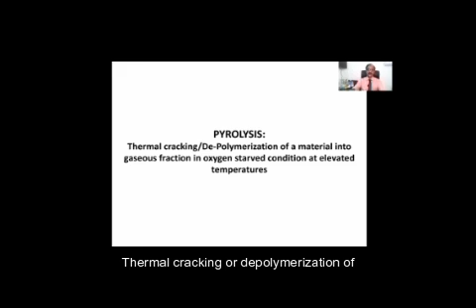Part 3, pyrolysis statement: thermal cracking or depolymerization of a material into gaseous fraction in oxygen-starved condition at elevated temperatures. Pyrolysis reactors: there are two types of reactors, batch type and continuous type.

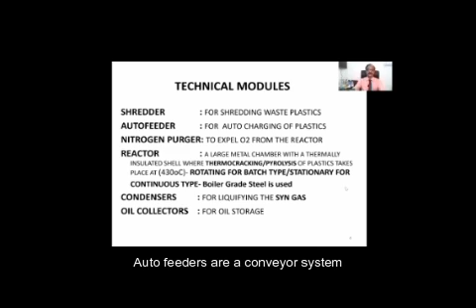Technical modules of the pyrolysis plant. Shredder: for shredding waste plastics, we use shredders. Autofeeder: autofeeders are a conveyor system used to carry plastic waste into the reactor, for auto charging of plastics.

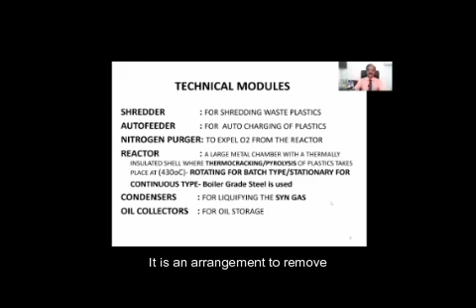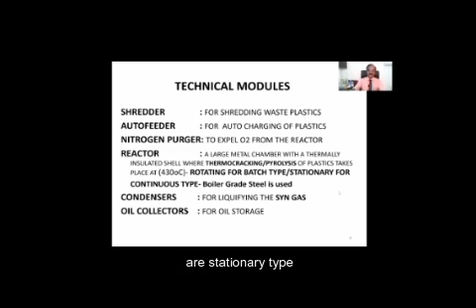Nitrogen purging machine: it's an arrangement to remove oxygen from the inner reactor. Reactor: a large metal chamber with a thermally insulated shell where thermocracking or pyrolysis of plastics takes place at 430 to 450 degrees centigrade. Batch type reactors are rotating type, and continuous type reactors are stationary type. Boiler grade steel is used for making reactors.

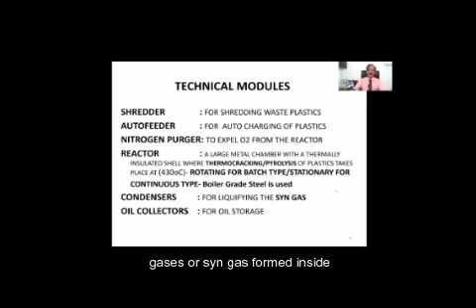Condensers: a series of condensers are used to liquefy the hydrocarbon gases or syngas formed inside the reactor. Oil collectors: the liquefied hydrocarbon gases will be collected in oil collectors. Plastic shredder: plastic shredders are used for cutting waste plastics into small particles. There are different brands of plastic shredders available in the market.

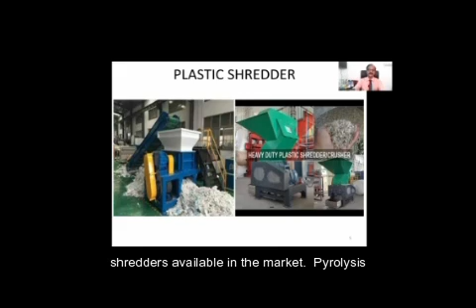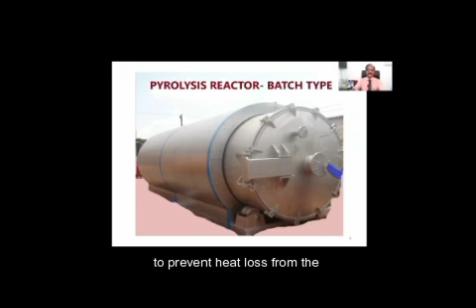Pyrolysis reactor batch type. A batch type reactor has two components: one is an outer shell and an inner rotating chamber. The outer shell is stationary type. It is filled with insulating materials like silica wool to prevent heat loss from the inner reactor. The temperature inside the reactor has to be kept constant and steady for efficient cracking of plastics.

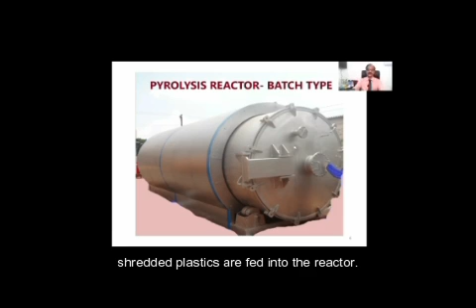This is a big door of the batch type reactor through which the shredded plastics are fed into the reactor. This is a ball bearing on which the inner reactor is rotating.

This is an inner view of the reactor rotating chamber. Blades are provided inside the rotating chamber to mix shredded plastics and catalyst, and also to keep uniform temperature inside the reactor.

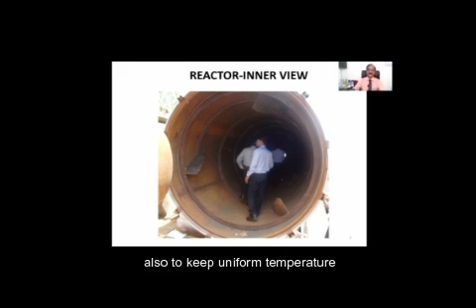Rear view of the reactor. This is an outlet through which the cracked hydrocarbon gases will come out. Another view of the ball bearing on which the inner rotating chamber is moving.

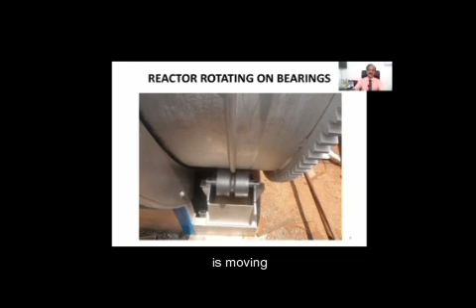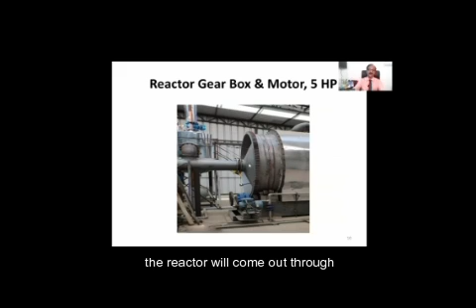Here there is a small motor, 5 HP capacity. With the help of this motor, the inner rotating chamber rotates. The hydrocarbon gas formed inside the reactor will come out through this pipeline, and through this pipeline it enters a series of condensers kept in a row.

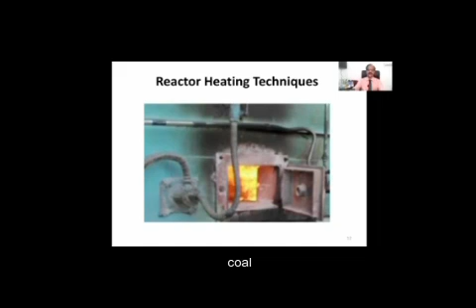A nitrogen purger is used for removing oxygen from the inner reactor. Heating area: the reactor has to be heated from the bottom. Different heating sources are used - LPG, coal, and even wood can be used for heating the reactor.

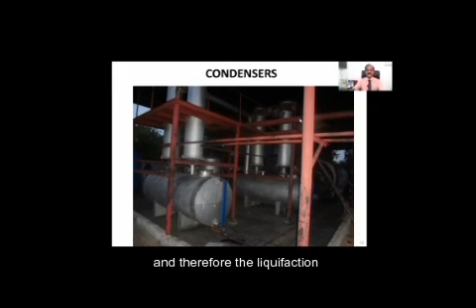Condensers, vertical condensers in a row. Different hydrocarbon molecules may have different boiling points, and therefore the liquefaction takes place at different temperatures. The low boiling point hydrocarbon gases will liquefy last, and high boiling point hydrocarbon gas will condense first. So we get different hydrocarbon fuels at different oil collectors.

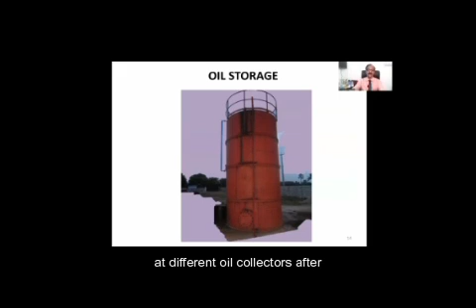This is oil storage facility. The oil or fuel collected at different oil collectors, after removing water by centrifuging technique, is stored in this oil storage facility. A scrubber is inevitable to purify the flue gases that come out from the reactor.

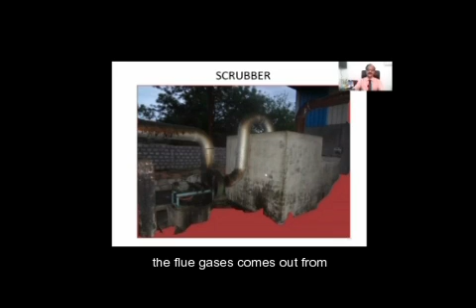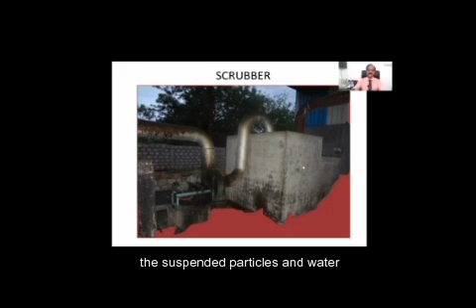The flue gas may contain suspended particles and water-soluble impurities. When this flue gas passes through this water tank, the suspended particles and water-soluble impurities are removed. The pure air which comes out from this scrubber will be sent to the chimney, and finally given out to the atmospheric air.

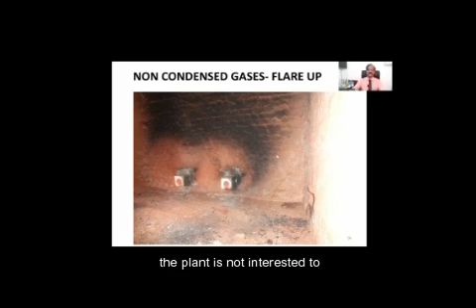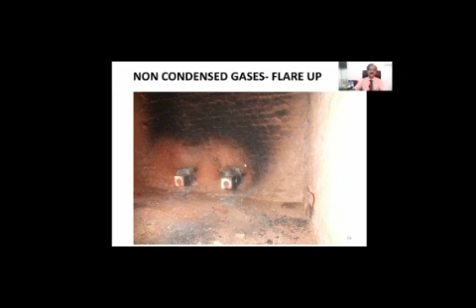It's a fireplace. The non-condensed gas in the pyrolysis process can be flared up here. If the owner of the plant is not interested to utilize the non-condensed gas formed in the process, then the gas has to be burnt here. It will be very difficult to store and keep these highly inflammable non-condensed gases. Therefore, if the non-condensed gas is not used in the reactor, then it has to be flared up.

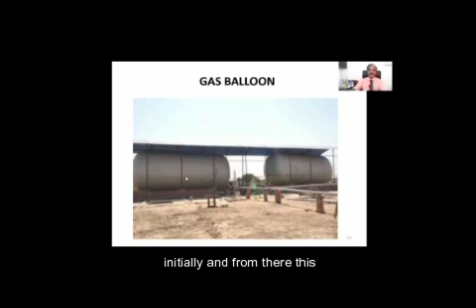If the investor decides to utilize the non-condensed gases formed in the process, then he has to store the non-condensed gases in gas balloons initially, and from there these are brought to the reactor for firing.

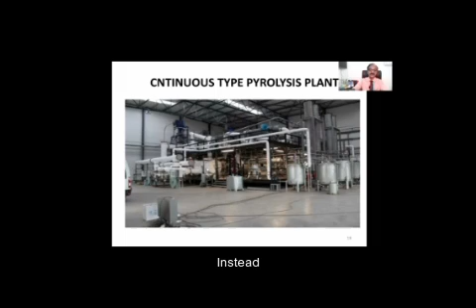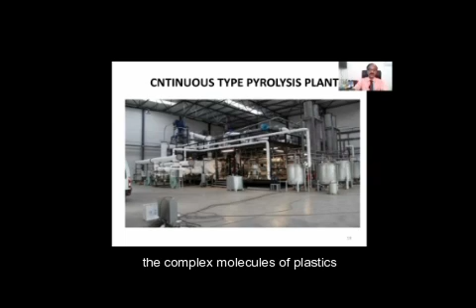Here, the heating is not done from the bottom. Instead, hot air is circulated through this double jacketed reactor. As soon as the temperature reaches 450 degrees centigrade, the complex molecules of plastics get thermally cracked and hydrocarbon gases will be formed. The molecular weights of plastics range from 50,000 to 2 lakhs.

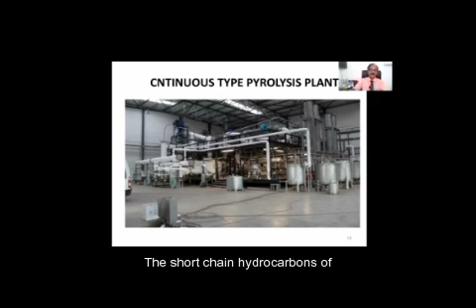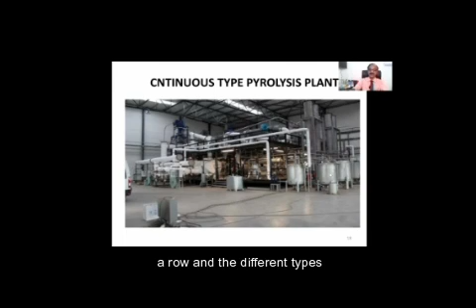Plastics are long chain hydrocarbons, and these long chain hydrocarbons on thermal cracking will be converted into short chain hydrocarbons of various types. These short chain hydrocarbons of different nature will come out and get condensed at different condensers kept in a row, and the different types of fuels will be collected at different fuel or oil collectors. Because of copyright issues, the full video of working pyrolysis plants cannot be shown here.

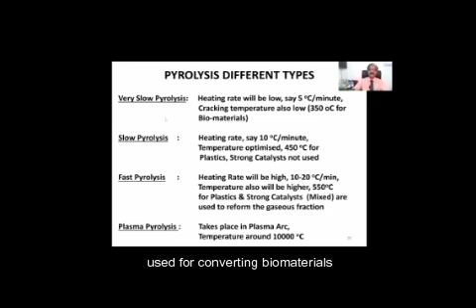There are different types of pyrolysis: very slow pyrolysis, fast pyrolysis, and plasma pyrolysis. Very slow pyrolysis is usually used for converting biomaterials and tire material into oil.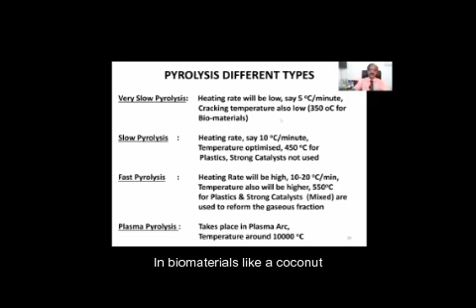Biomaterials will give oxygenated oil, while tire will give hydrocarbon oil. The heating rate in very slow pyrolysis is 5 degrees centigrade per minute, and the cracking temperature is usually 350 degrees centigrade. In biomaterials like coconut shell, thermal cracking starts from 200 degrees centigrade up to 350 degrees centigrade.

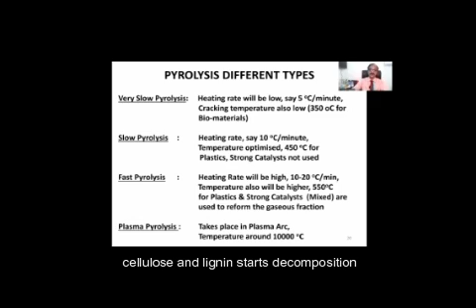Between these temperatures, hemicellulose, cellulose, and lignin start decomposing, and oxygenated hydrocarbon gas will be formed. This gas, on liquefaction, gives us bio oil.

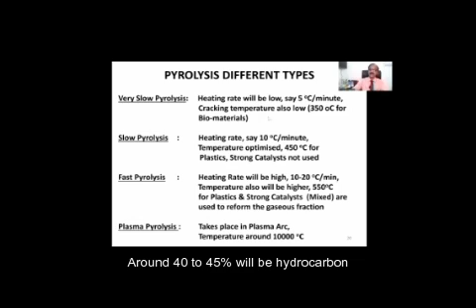The remaining fraction of the biomaterial will be good quality charcoal. In tire pyrolysis also we get oil, but the oil is of a hydrocarbon nature. Around 40 to 45% will be hydrocarbon oil, and some 40 to 45% carbon will also be formed.

In slow pyrolysis, we generally use plastics. The rate of heating in slow pyrolysis will be a little higher, 10 degrees centigrade per minute, and the cracking temperature is 450 degrees centigrade. Good quality furnace oil will be formed in slow pyrolysis.

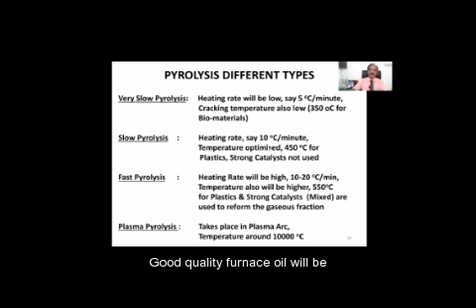Fast pyrolysis is also known as catalytic fast pyrolysis. The heating rate in catalytic fast pyrolysis will be higher, 10 to 20 degrees centigrade per minute, and the cracking temperature is further raised to 550 degrees centigrade.

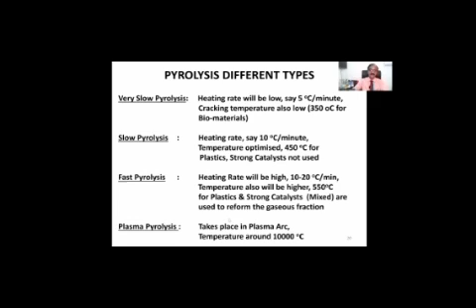Here we use efficient catalysts like alumina and zeolite. Plasma pyrolysis is the highest version of pyrolysis. It takes place with the help of a plasma arc at a very high temperature, 10,000 degrees centigrade. Usually, municipal solid waste can be converted into electricity and other forms of energy with the help of this technology.

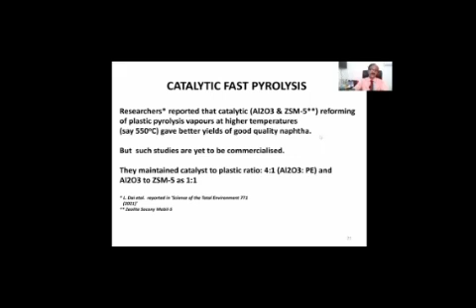Catalytic fast pyrolysis: researchers reported that catalytic reforming of plastic pyrolysis vapors at higher temperatures, say 550 degrees centigrade, gave better yields of good quality naphtha. But such studies are yet to be commercialized.

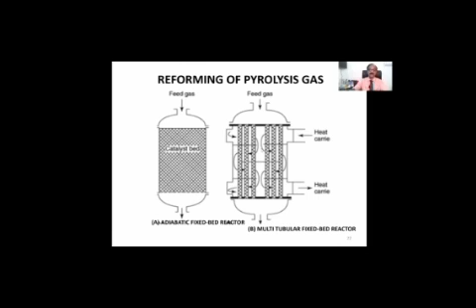This is the reforming chamber in catalytic fast pyrolysis. The chambers are filled with efficient catalysts like alumina and zeolite. Two different types of reforming chambers are shown in the picture.

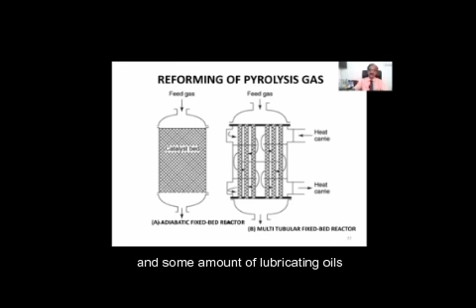As soon as the reforming completes, the hydrocarbon gas which comes up from slow pyrolysis will get cracked in these chambers, and short chain hydrocarbons will be formed, and good quality naphtha and some amount of lubricating oils are also formed. This is the mechanism of cracking.

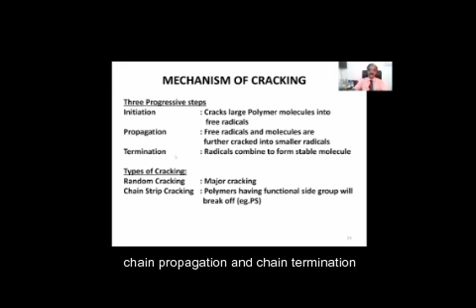In this process, there are three steps: chain initiation, chain propagation, and chain termination. In the first stage, large polymer molecules crack into free radicals. In the second stage, chain propagation, free radicals and molecules are further cracked into smaller radicals. In chain termination, the radicals formed in chain propagation combine to form stable molecules.

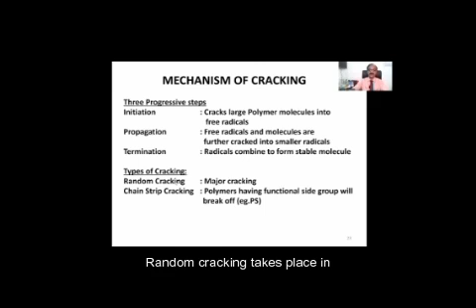Types of cracking: random cracking and chain strip cracking. Random cracking takes place in the majority of molecules, but chain strip cracking takes place in molecules having a side chain, like polystyrene.

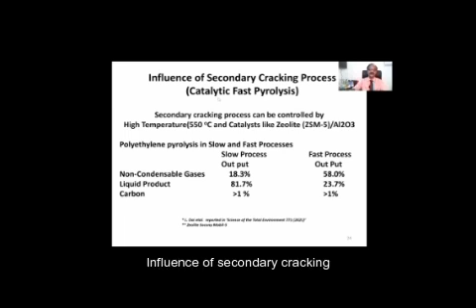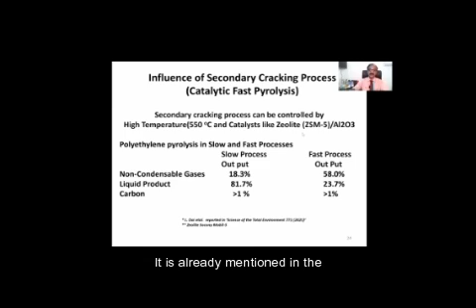Influence of secondary cracking process in catalytic fast pyrolysis: secondary cracking can be controlled by high temperature, 550 degrees centigrade. Catalysts like zeolite and alumina are used here, as already mentioned in the previous slides.

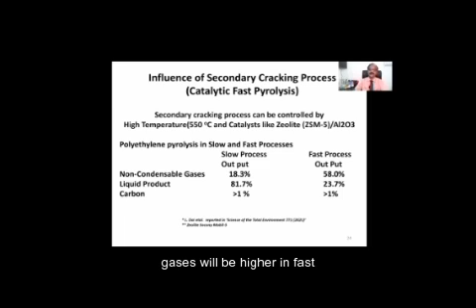If polyethylene is subjected to catalytic fast pyrolysis, we can compare the outputs in slow and fast processes. In slow pyrolysis, non-condensable gases formed will be only around 18.3%, but the non-condensable gases will be higher in fast pyrolysis, coming to around 58%.

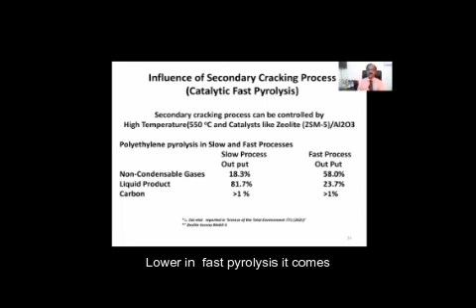The liquid product will be more in slow pyrolysis, but the liquid percentage will be lower in fast pyrolysis, coming around 23.7% only. The carbon percentage in slow and fast pyrolysis will be around 1%.

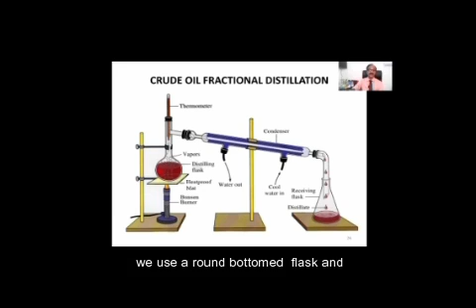Crude oil fractional distillation. This is a laboratory scale fractional distillation setup. We use a round bottom flask and a thermometer, and here is a condenser and a receiver. The crude pyrolysis oil is kept in the round bottom flask and it is heated.

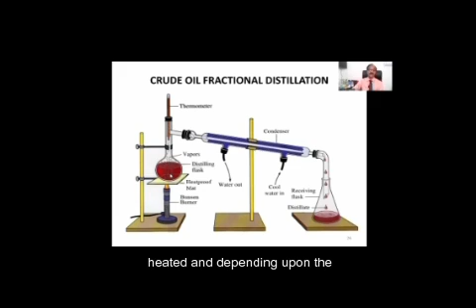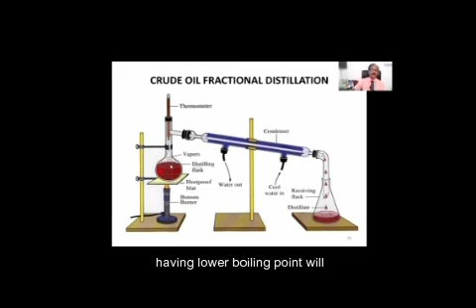Depending upon the boiling points, various molecules will be evaporated. The hydrocarbon oil or fuel having lower boiling point will boil first, and the vapors will pass through the condenser and condense in the receiver. Depending upon the boiling point, various fractions will come out through the condenser, and each fuel can be collected in different receivers kept here.

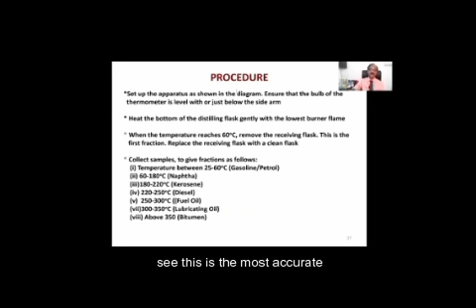Procedure: this is the most accurate form of fractional distillation. The various fractions we collected at different temperatures are shown. Temperature between 25 to 60 degrees centigrade, we get gasoline or petrol.

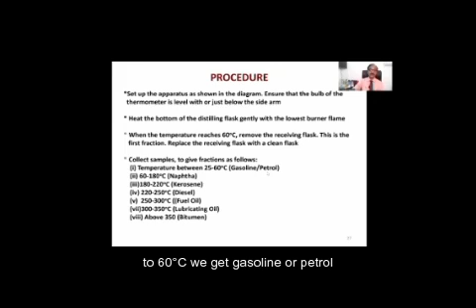Gasoline or petrol is highly volatile, and it is collected at lower temperatures. Naphtha is also highly volatile. It is collected between 60 to 180 degrees centigrade.

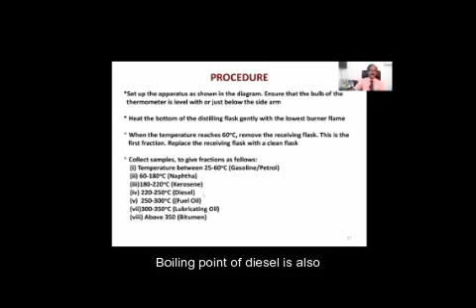Kerosene's boiling point is a little higher. It is collected between 180 to 220 degrees centigrade. Boiling point of diesel is also higher. It is collected between 220 to 250 degrees centigrade.

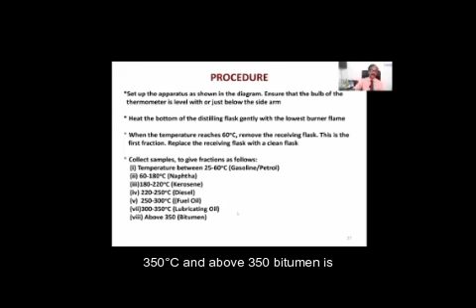Fuel oil is collected between 250 to 300 degrees centigrade. Lubricating oil is collected between 300 to 350 degrees centigrade. Above 350, bitumen is the end product.

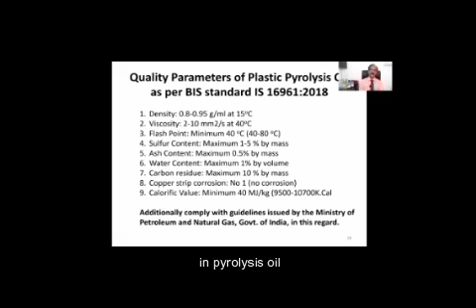Till 2018, there were no quality standards for pyrolysis oil. But as per BIS standard IS 16961 2018, 9 parameters are to be met in pyrolysis oil: density, viscosity, flash point, sulfur content, ash content, water content, carbon residue, copper strip corrosion, and calorific value.

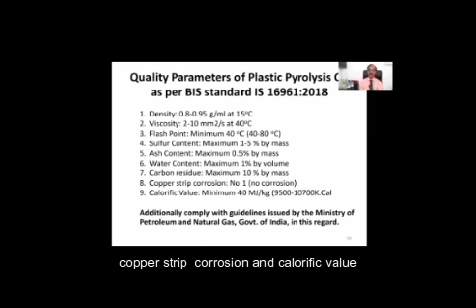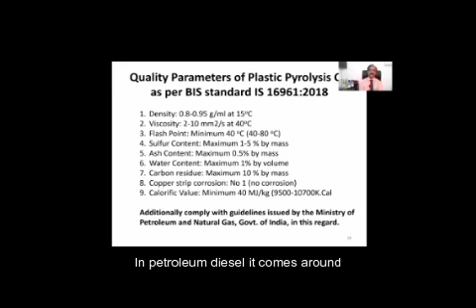Flash point: it should be minimum 40 degrees centigrade, but it varies between 40 to 80 degrees centigrade. In petroleum diesel, the flash point comes around 45 to 55.

But in pyrolysis oil, minimum 40 should be there. The flash point of pyrolysis oil should be minimum 40 degrees centigrade, but generally it varies between 40 to 80 degrees centigrade.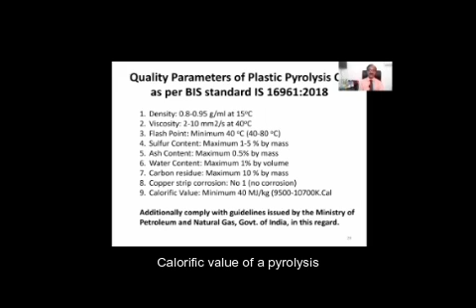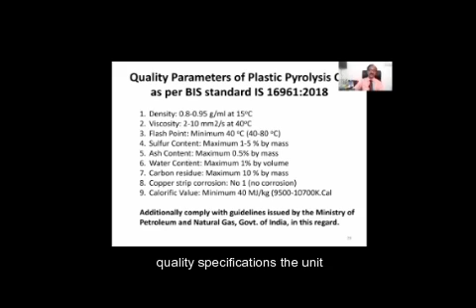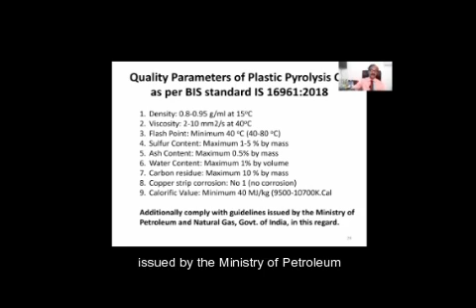Calorific value of pyrolysis oil should be minimum between 9,500 to 10,700 kilocalories. Apart from these quality specifications, the pyrolysis unit owner has to follow the guidelines issued by the Ministry of Petroleum and Natural Gas, Government of India.

Energy profit of pyrolysis: energy requirement to pyrolyze 1 kilogram polyethylene is 250 kilocalories. But if we examine the calorific value of 1 kilogram pyrolysis oil, we can see that its calorific value is 10,342. Therefore, it is very evident that the energy profit in this project is very high.

Energy requirement to pyrolyze 1 kilogram polyethylene is just 250 kilocalories, but we get 10,342 kilocalories from 1 kilogram pyrolysis oil. Therefore, this project is economically viable. Energy profit is very high.

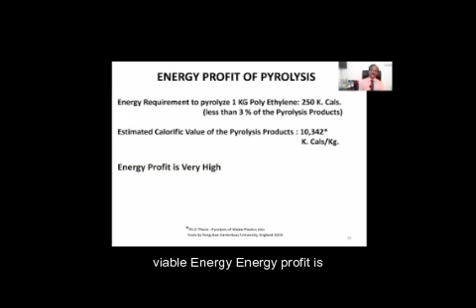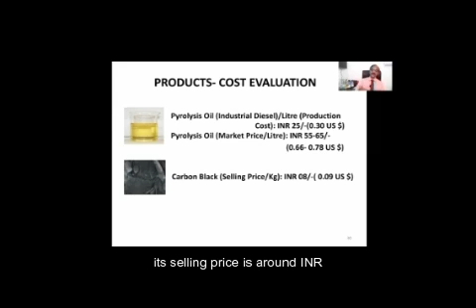Product cost evaluation: pyrolysis oil's cost of production per liter comes around INR 25, 0.30 US dollars. Pyrolysis oil market price per liter is INR 55 to 65, 0.66 to 0.78 US dollars. In this process, we also get a low quality carbon black, whose selling price is around INR 8, 0.09 US dollars.

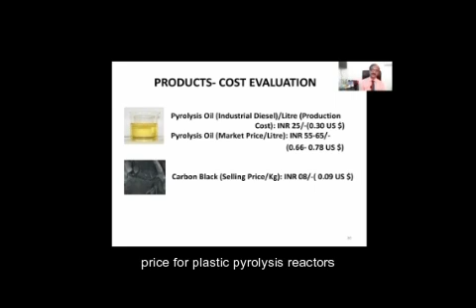Before summing up this presentation, I would like to mention the prices of common pyrolysis reactors. Being an evolving technology, there is no standardized price for plastic pyrolysis reactors. However, in India we are manufacturing both batch type and continuous type reactors.

The cost of batch type reactors varies between 70 lakhs to 120 lakhs. It depends upon the interest of the manufacturer, and the manufacturer decides the price.

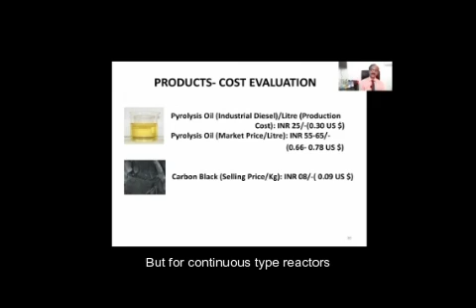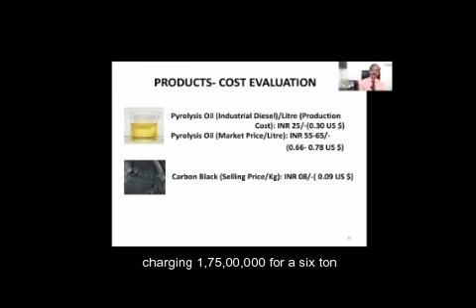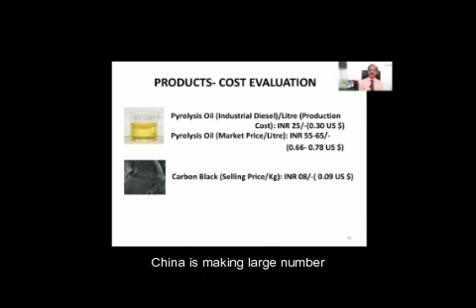But if we are interested to buy a pyrolysis plant from abroad, China is making a large number of pyrolysis reactors, and the cost of a Chinese plant comes around 63 lakhs only for a 10 TPD plant.

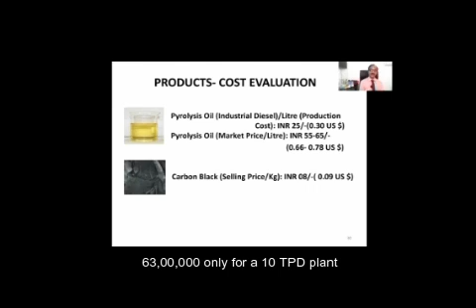We need to add some extra amount to the project, because all plant manufacturers are mentioning the cost of the reactors only, and we need to add extra costs like shipping cost, road transportation cost, installation cost, personnel, etc.

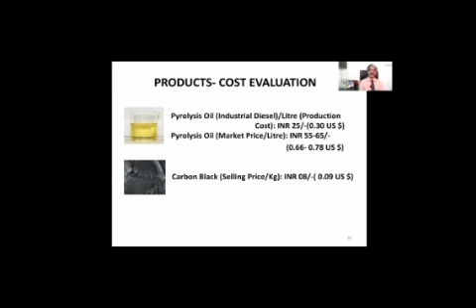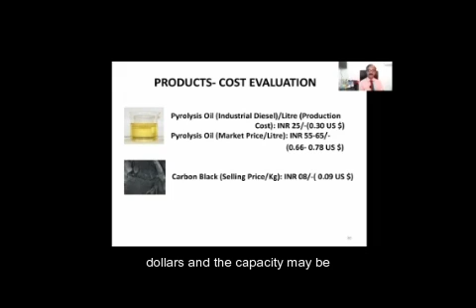But one more point: if the investor is interested to go for high-end technology, and if they are capable to invest more, they can go for advanced pyrolysis technology available in countries like the US. The cost of such a plant will be around $5 million US, and the capacity may be around 40 tons per day.

These are something about the cost factors of pyrolysis plants.

In conclusion, let us embrace plastic as a valuable resource, not an enemy. By adopting scientific disposal methods, we can unlock its full potential. Pyrolysis, a proven technology, transforms plastic waste into valuable products like petroleum diesel.

It is disheartening that despite Kerala government's approval in 2012, the project remains unimplemented. Meanwhile, some other states and nations have successfully adopted this technology. I urge authorities to revisit this project, recognizing its scientific validity and economic viability.

Let us join forces to turn plastic waste into a sustainable opportunity. Together, we can create a cleaner, greener future. Thank you for your attention, and let us drive change.